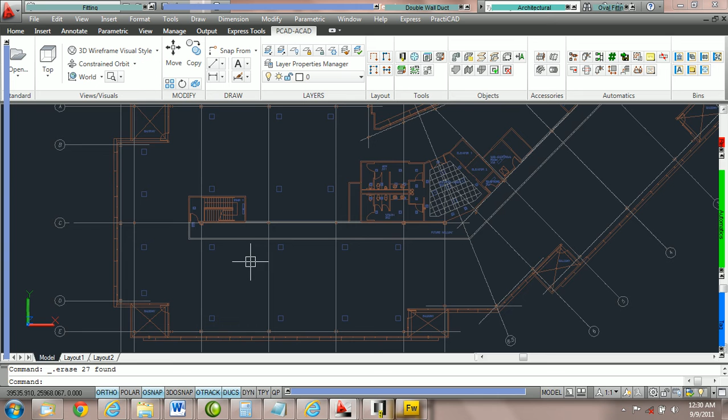First, open up your PractiCAD exercise template. Then we're going to zoom in here to the two grills on the bottom.

Go into your workbox and select a zone. I'm going to choose supply. Remember that your zones and spec tables might be different than the ones you see on this tutorial. Select a zone and select a specification. Here we're going to select 2-inch water gauge.

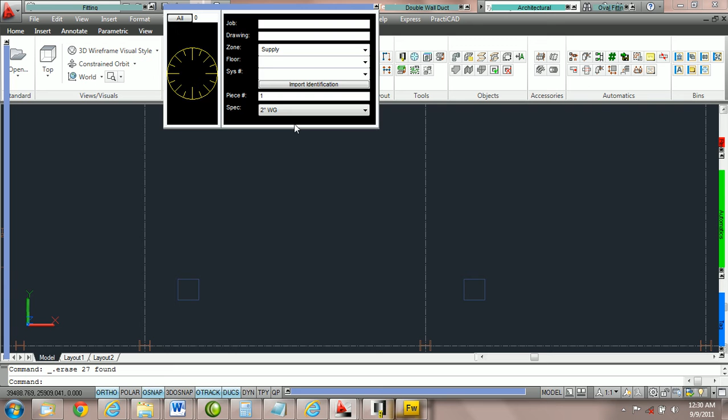Then go into the fitting parameter box and choose rectangular duct. We're going to size the rectangular duct to 42 by 24. Put the bottom elevation at 15 foot.

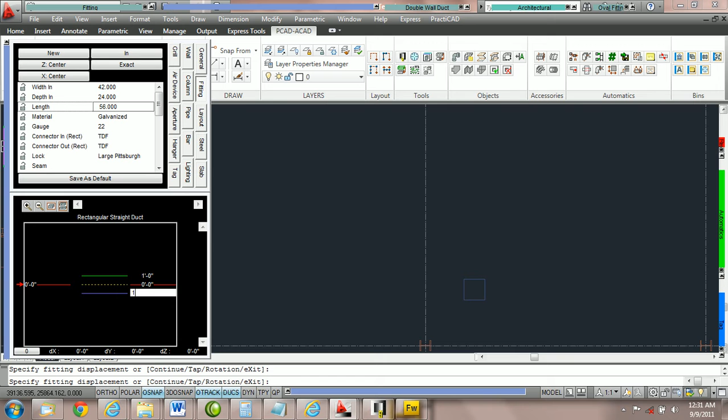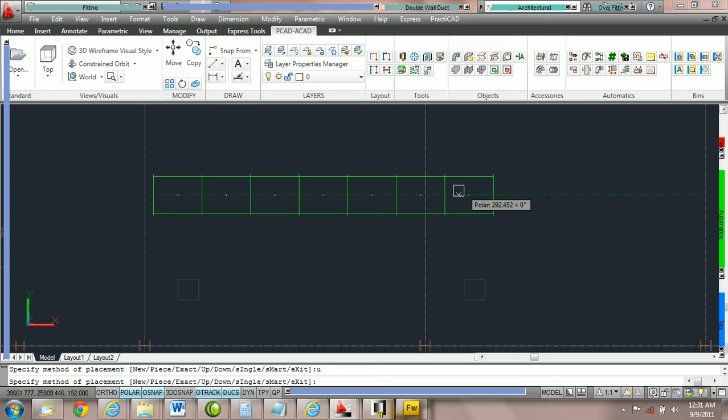Now what we need to do is draw a duct line a little bit above the grills. You can do this by sight. I'm going to click here. Make sure that you've got polar tracking on so it's easy. I'm going to click again, and then I'm going to use the up method, U spacebar, and route a duct line.

Then go to your fitting parameter box and grab the 45-degree boot tap. Go to the fitting box and change the width out by using your wheel mouse up to 14. Notice that it changes the width in as well. The 45-degree boot tap always stays at 45 degrees and it auto calcs the width in and width out.

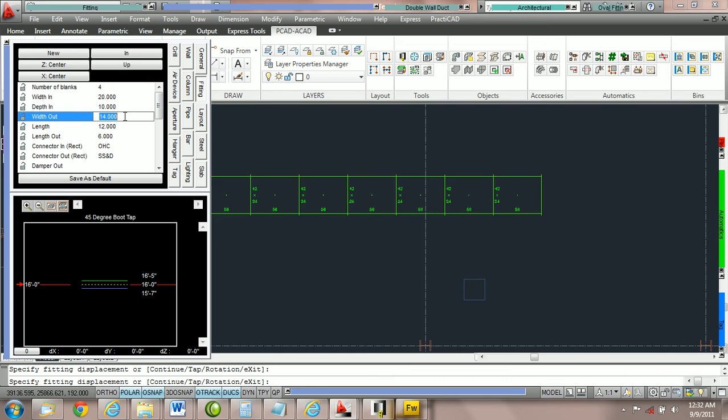Now click on your screen to get control of it. I'm going to zoom and pan. And now notice in your command line it says continue tap rotation. Hit T for tap and hit spacebar.

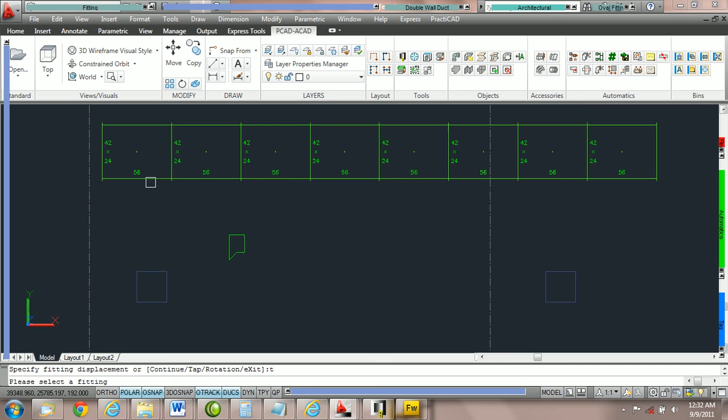PractiCAD should ask you to select the fitting. We're going to select the fitting nearest the grill. I'm going to click once. When we do that, we should have our tap parameter box open.

Make sure we have set fitting on in. Then go to orientation and make sure you select near for the right side of the duct. Rotation we're going to keep as 0 because it's a supply run. We don't need to flip the boot tap over.

And what we're going to do is first click on in from in to side. Notice we have tap in, to side checked, and in from in to side. I'm going to move my mouse up and down. Notice how you can just scroll it into position.

You should have your in from top to side and in from bottom to side parameters equal. If they're equal, this boot tap is centered. If you change in from bottom to side to 0, the boot is at the bottom of the duct it's attached to. Here I'm just going to roll them both until they're equal. Going to give this one 7.

Now come over to where you've got your grill and click on the drawing once. And then move your cursor back and forth. You should see that the boot tap is following your grill.

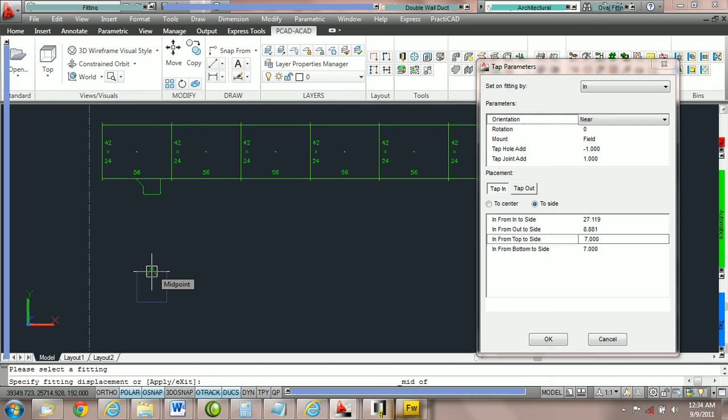So what we're going to do is highlight the area of the grill we want to center to. Here you can see that we don't have a center point yet or a midpoint. So I'm going to hold the shift key down and right click, and I'm going to choose midpoint. Then Autocad should give us a midpoint to attach to. Once we have the midpoint lit, click once.

Dependent upon whatever routing method you choose, PractiCAD should start routing duct. Now, in this exercise, I'm going to switch it by hitting M spacebar to the smart method. That will extend the straights of the boot. But notice you can change it from E spacebar to exact or U spacebar for up and choose which method will work best. I'm going to hit M spacebar for smart. Then I'm going to click on the corner of the grill.

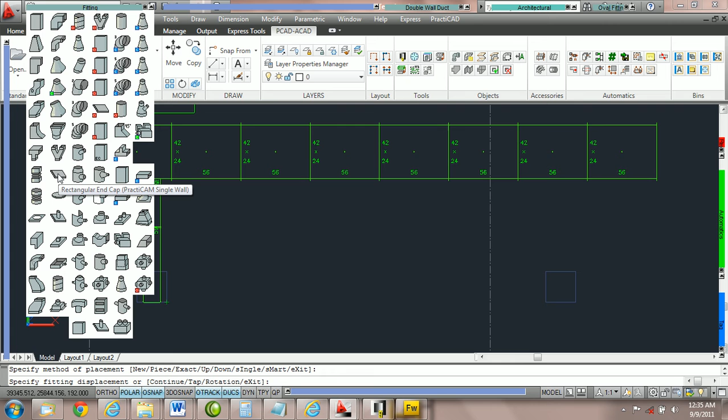Now go up to your fitting parameter box and find where your end cap is. In my bin, the rectangular end cap is right here. Going to click on it and then hit C for continue spacebar. That should snap the end cap with one click to the end of the duct line.

Now we're going to move this over 48 inches. Hit escape to let go of your fitting.

Click once on the boot tab. Since everything's connected, all we have to do is move the boot tab over and all the duct afterwards should go with it. You should have the in joint highlighted, shown by a blue node representing the in joint.

I'm going to click my mouse on it and pull the duct over. Press F8 for ortho, and notice we can now cleanly move it up and down. You should have ortho depressed down in your snaps, so now I'm going to move it up and down the line.

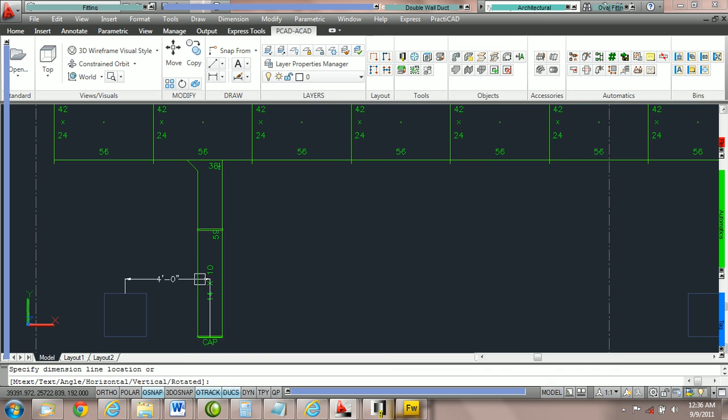We're going to type in 48 and then hit enter, and that should move it over 48 inches. If we do a dimension line from the midpoint here to here, that is exactly 4 feet, so we've done it correctly.

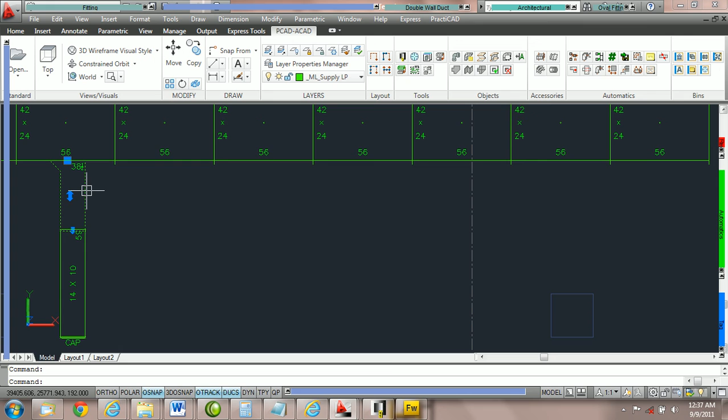Now we're going to copy the tap over. Pan your screen so we can see the tap here. We're going to copy this duct line over to this grill. First, click once with the left mouse click on the boot tab, then right click and go to Edit Fitting, and click on Edit Fitting.

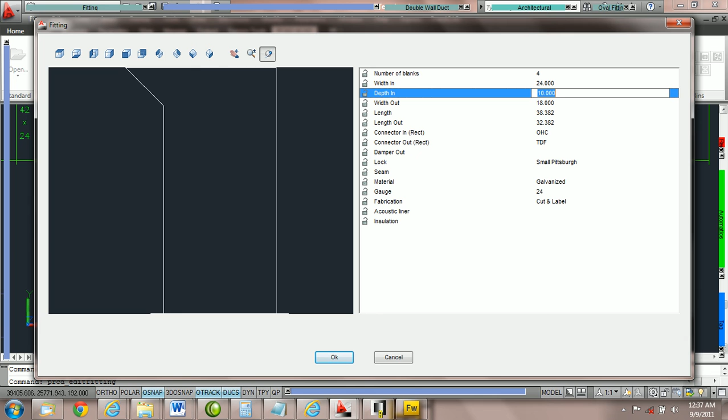Notice here we can change the parameters of the duct. I'm going to change the parameters to 24 width in, and then press OK. That is how to edit the duct in place.

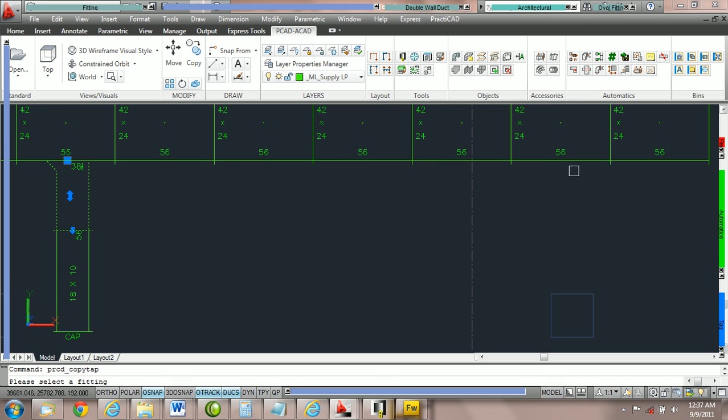Now to copy the duct, we're going to right click again and go down to Copy Tap. PractiCAD should say please select a fitting. Select the fitting close to the grill. You might need to pan your screen over, but right now we should have the crosshairs. If you click on the screen, the boot tab should be following.

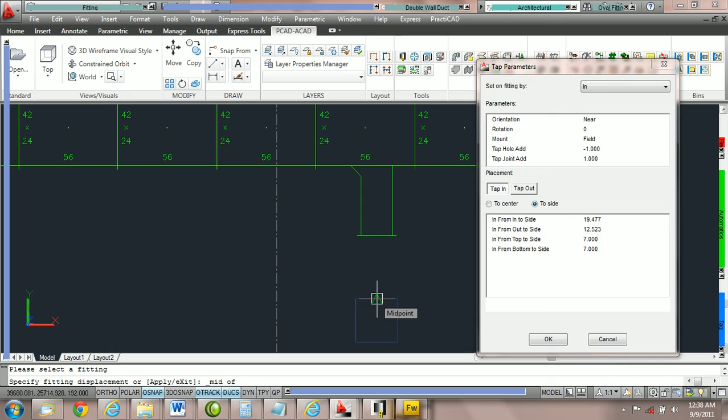Once again, I'm going to shift right click and grab the midpoint, then hold the boot tab where I want it to go and click once. Now we've copied the tap over successfully.

To make sure we've done that correctly, highlight the area and then click on your duct line check to make sure you don't see red marks in front of the boot tabs. Here you can see we've done it correctly. To remove the marks, let's go back into automatics and click duct line check again.

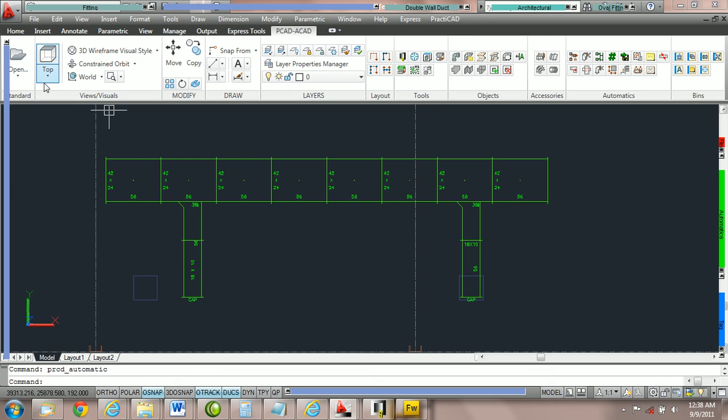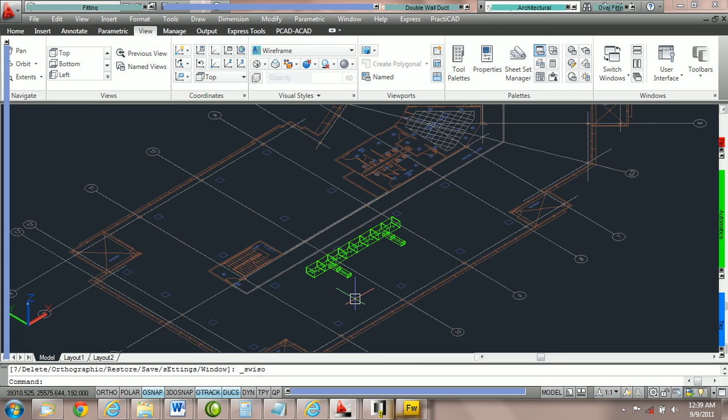Now take your drawing and put it in Southwest Isometric View. On your ribbon, you can also access that from the View panel, and then choose the view you want. You can also get it from View in the menu bar as well, depending on what you have turned on. I'm going to zoom in to our duct.

Now let's edit it from the property box. We can right click and do edit fitting, or we can edit the taps from the property box. Click once, then right click and select properties. You can also double click on your fitting.

Go to the tap parameters in your Autocad property box. Take a look at what value you have for In From In to Side. I'm going to add 3 inches to that value to move the whole duct line over 3 inches. On my exercise it says 17.119, so I'm going to type in 20.119.

Move your tap 3 inches over the same way. Now we're going to change the elevation. Go to where it says in from bottom to side and note what value you have here. We're going to move the duct down 3 inches. All we need to do is subtract 3 inches from this number, and I'm going to type in 4 on my screen and hit enter, and that will lower the duct.

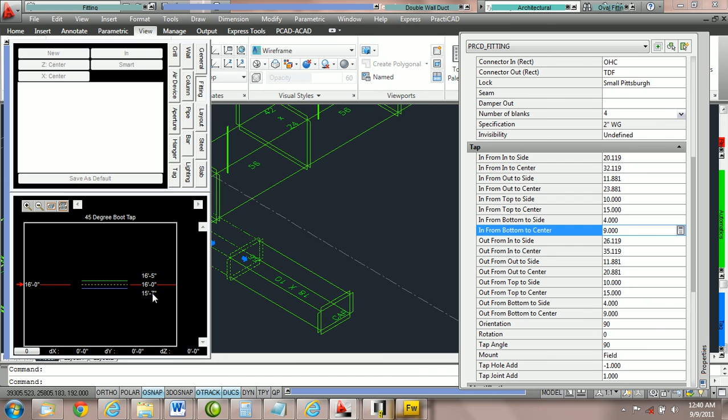You can see the elevation of the duct line by looking in your elevation box. Mine's at 15'7". Take note, we can change it here, but if we pick an elevation that raises the duct off the main trunk line, we will get a break, and duct line integrity will be broken, meaning we won't be able to edit the entire duct line later.

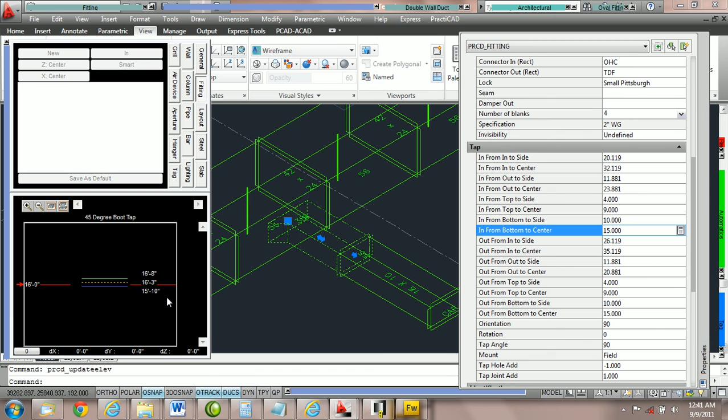However, if you raise it through the elevation box an amount that keeps it attached, it will work. For example, here I'm going to type in 15'10" and move it back. Notice that the duct is still attached using duct line check, because we've done it correctly.

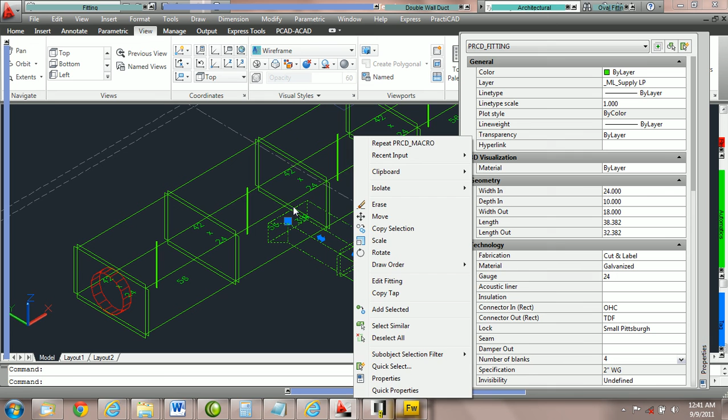I always recommend editing the duct from the Autocad property box first. If you're going to edit the fitting, edit it here or right click edit fitting, and if you're going to copy the tap, use the copy tap feature inside your PractiCAD options. That'll conclude the exercise on taps.